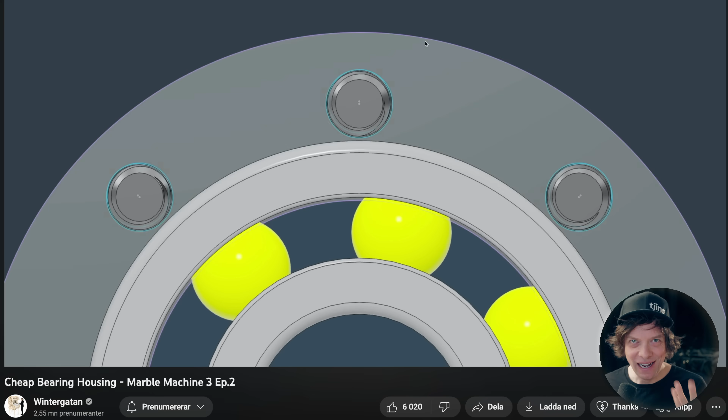Welcome everyone to episode 3 of Marble Machine 3. Last week, I caused a big controversy. I released this video, Cheap Bearing Housing. 99% of the feedback was, this is such a horrible idea. Please, Martin, stop this madness.

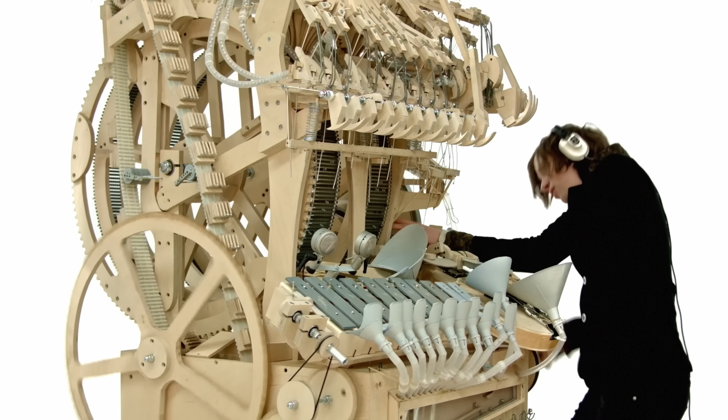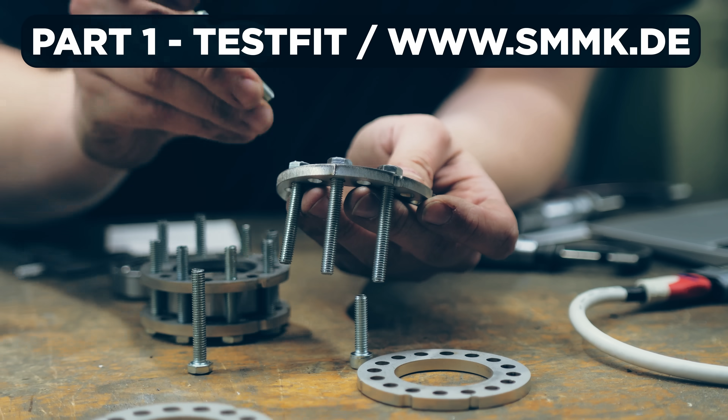In this week's video, I'm making a 3-part follow-up on this controversial design. And in the first part, Lucas from Siegfried's Mechanical Music Museum in Rüdesheim, Germany, is doing a test fit of the actual design because 24/7 Tailor Steel already sent the pieces. It was really fast and we can test this design out in real life.

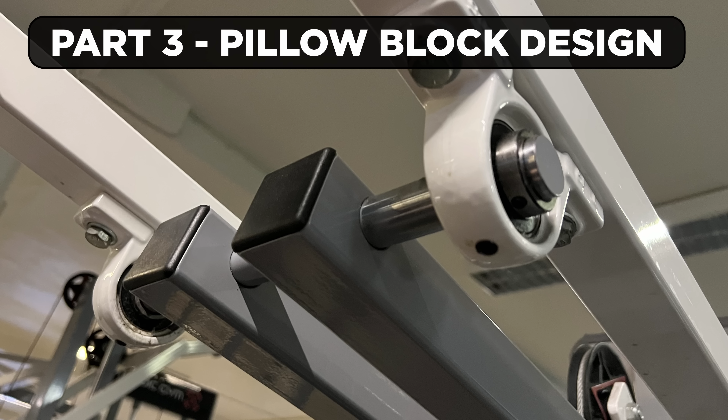And in the second part of the video, we're having a deep dive discussion about this controversial subject, and I'm using the feedback that you all left on the Reddit page as a starting point for the discussion. And in the last part of the video, I'll show you this brand new design that I made this very morning, inspired by gym machines, a design using pillow blocks, a much more standardized way to do things. So we're going deep into bearing housing discussions this week, and let's start in Germany with Lucas Wendel.

Let's open the box. How are you, Lucas? I'm doing fine. How are you? Very excited. It's the first part and it's a design that everyone loves. Not sure about that.

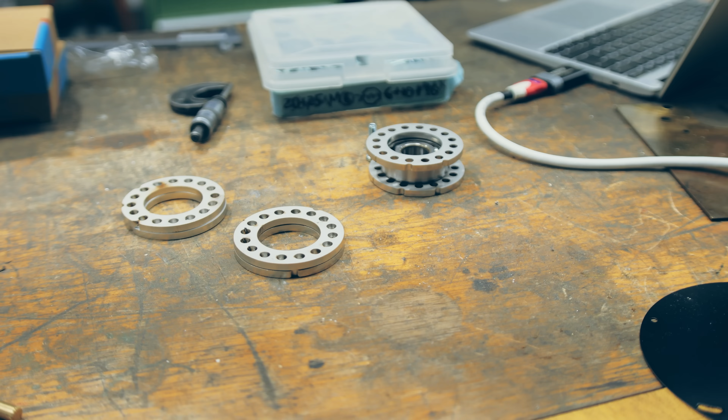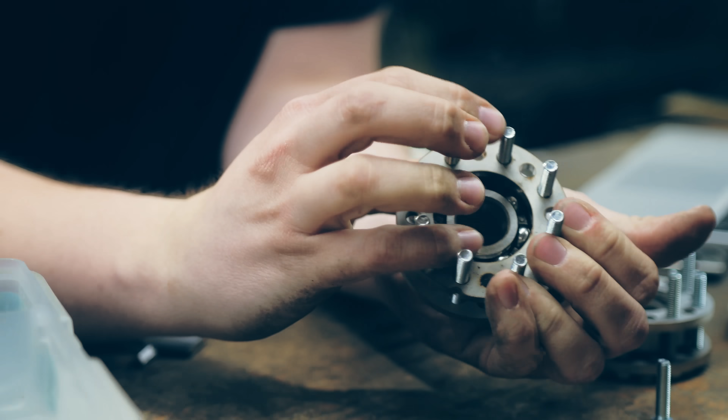So what are we testing here? These metal discs have holes cut at different positions. So what Lucas is doing is he's putting the bearing in and testing if we have a nice press fit. We started with the largest pattern, and as you can see, this is way too big, which I was expecting. So we worked ourselves down, and the smaller the pattern we tried, the better the fit we have. It's a nice fidget spinner you built there, I gotta say.

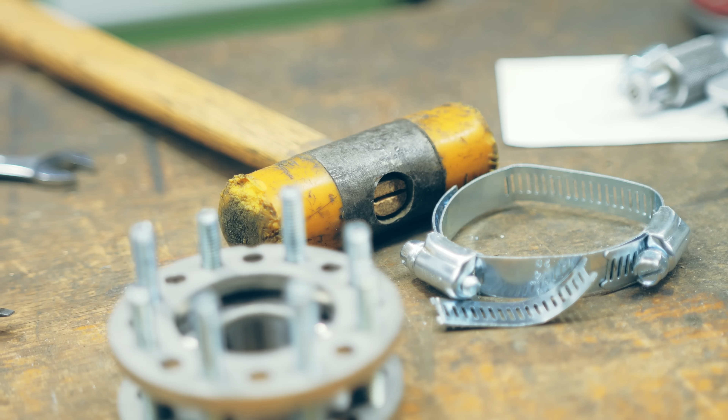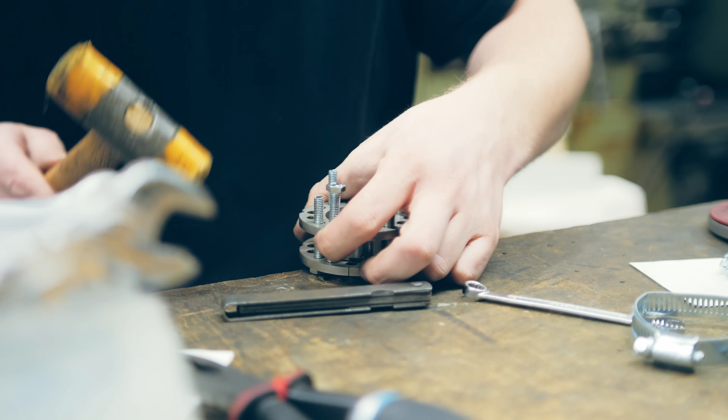Here's my whole point with this design that I think almost everyone who has left negative feedback is missing. Laser cut steel plates are not machined. They don't have machined precision. So how can we locate a bearing or a flanged bearing housing with high concentricity with a steel plate? Well, the best way to do that is to have a press fit, and at the very smallest tolerance, which Lucas is trying here, he has to hammer the bolts in, and the bearing is super snug in there.

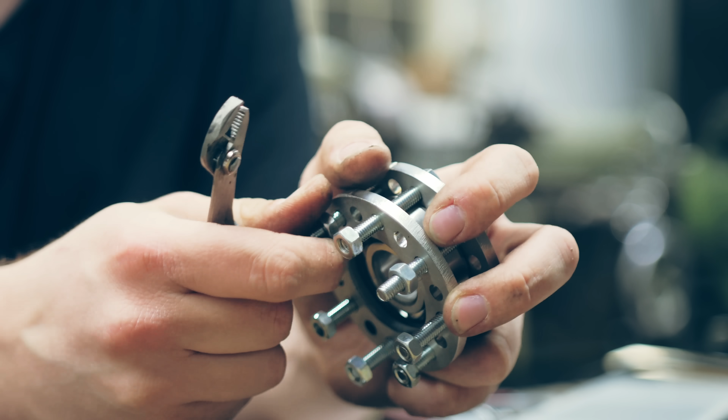At the end of the test, me and Lucas felt like the 2 tightest fits were the 2 good ones. And if I'm going to move forward using this idea, that's the fits I will use. For me personally, I do not think this is the burning dumpster fire that you all think in the comments. I think actually this is a super viable design option.

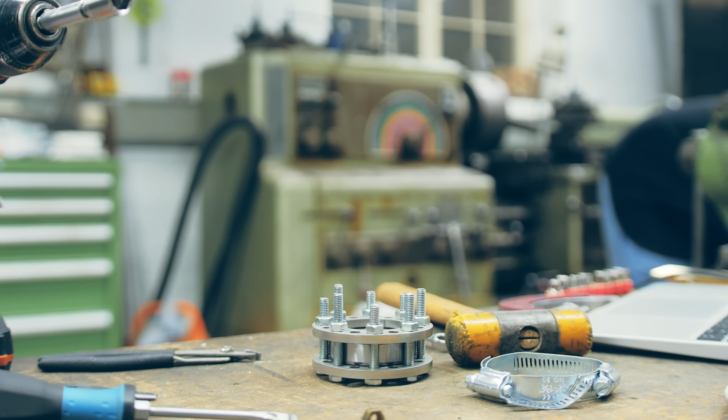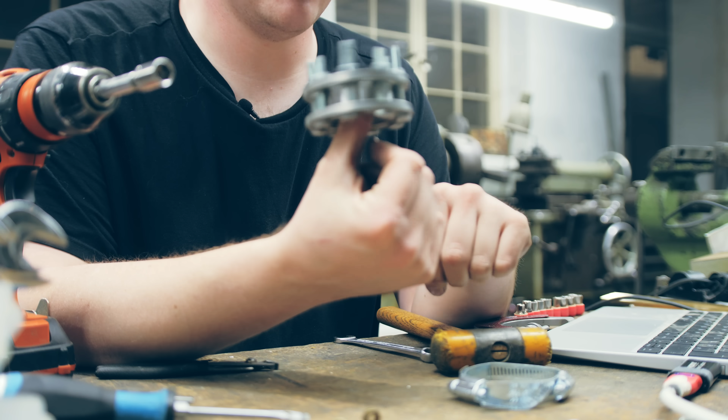This design is also clamping to the sides of the bearing, which solves perpendicularity. It pushes the laser cut plates into 90 degrees alignment with the shaft. So this design makes a press fit solving for both concentricity and perpendicularity, which I think most of all the negative feedback is completely missing. Honestly, Lucas, now when you feel it, I know you still don't like it, but do you hate it a little bit less? I'll hate it less once it shows that it can perform, because that's what counts.

Lucas had prepared a surprise for me. He had gotten the kind of flanged bearing housing that everyone in the comments thinks that I should use for this application. Okay, there we go. There we go. Here it comes.

I mean, this? Boo! You just want engineers of the world to love you more than they love me, and I think probably you're succeeding now. They can just come and thank me in the museum during the tour.

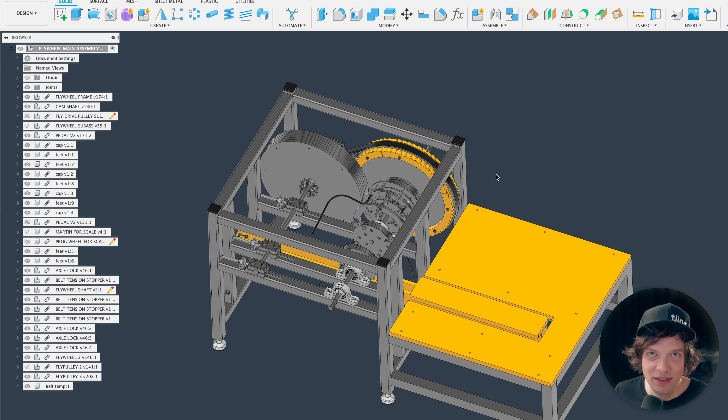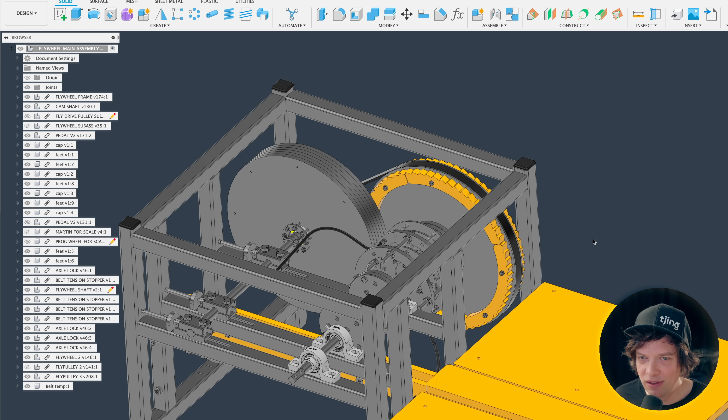This is the power input module prototype for the Marble Machine 3. The one solution that caused so much controversy and drama is this way to mount a bearing. We're going to go through my main motivation for why I want to experiment with this solution. So last week's video was titled Cheap Bearing Housing, and that was super misleading, and that's all on me. The price is not at all my main motivation why I want to try this. So the video lacked a lot of context, and it was even misleading.

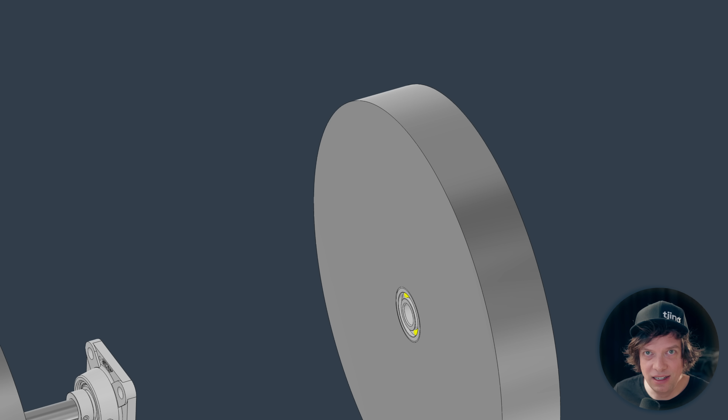So let's prime the whole discussion by showing these 4 different ways of achieving a spinning object. The first one here, 2 flanged bearing housings, off-the-shelf parts, standard solution, proven to work, very, very good. Next solution is the completely lathed flywheel. So here we have a perfect running-true flywheel, lathed by a machinist with shining metal. It would make a beautiful YouTube video. And we press the bearings in with a press fit and an arbor press.

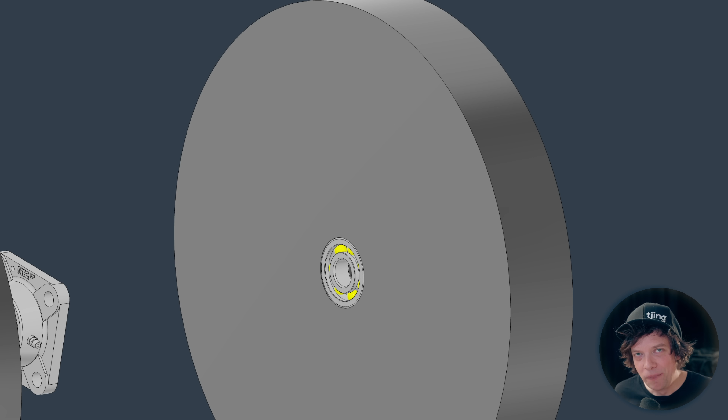It's perfection. But my friends, it's too much perfection. And here's a big takeaway that I want to share with you. The biggest enemy to a good plan is a perfect plan. So to have a machinist manually lathe this flywheel, it's very, very overkill. Yes, the bearing seating would be world class, space grade, but we don't need that for my application. So the real discussion in this video lies between these 2 solutions.

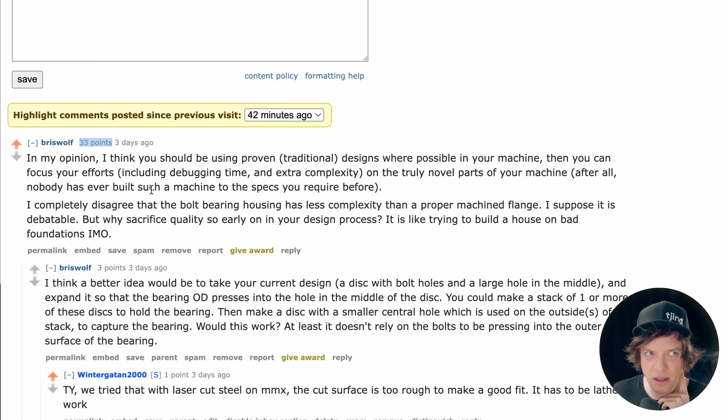In my opinion, I think you should be using proven traditional designs where possible in your machine. Then you can focus your efforts, including debugging time and extra complexity, on the truly novel parts of your machine. After all, nobody has ever built such a machine to the specs you require before. I completely disagree that the bolt bearing housing has less complexity than a proper machined flange. I suppose it is debatable, but why sacrifice quality so early on in your design process? It is like trying to build a house on bad foundations, in my opinion.

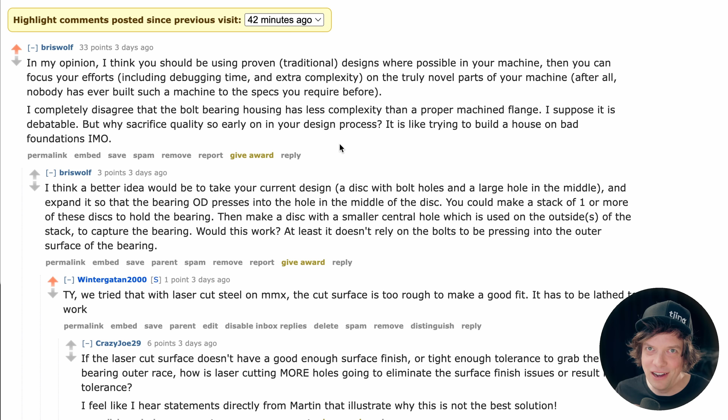Briswolf is really leading with a great example here on how to formulate feedback. It's straight to the point, it's unemotional, and it's been highly upvoted. Thank you, Briswolf, for this. Wholeheartedly agree on this first part. On the second part, I would like to address this: it is like trying to build a house on bad foundations, in my opinion.

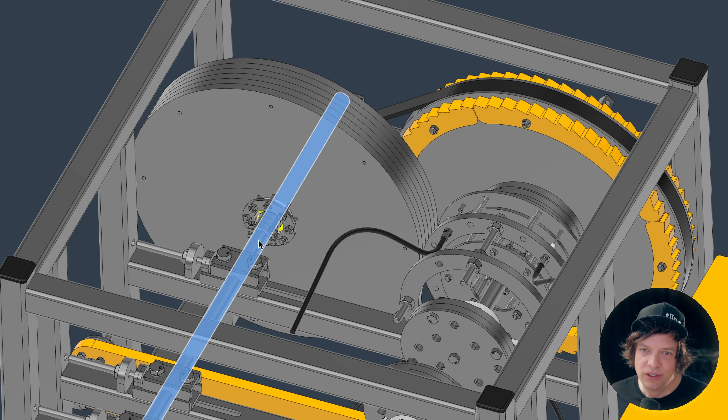The way I'm designing this machine is modular. What I'm doing here is I'm welding the steel frame. All the other parts are bolted on. So if this solution doesn't work out, I can head over and use one of these solutions. I've given myself the design space to do some experimentation. And yes, that's expensive. Prototyping, iterating is expensive. But some of that might actually be worth doing in the beginning of a process. But I completely agree with Briswolf that using proven traditional designs where possible is a winning method.

If you want this machine to be reliable, please use standard components where necessary that have been proven and can easily be replaced. Yeah, there will be so many problems with this design. I think Martin's underestimated the forces a bearing experiences. It may start off all right, but as more stress is put on the bearing as the machine gets built up, it will certainly begin to fail. I don't agree with the certainty. It will certainly begin to fail. Things are not binary. There are nuances to everything.

So let's look at the data and let's look at what the bearings are listed for, and let's compare to the forces they will experience in my application.

By the way, I am in discussions with SKF, which is a famous Swedish bearing company, to provide feedback on all my designs, and they have given me positive response. They are looking at my flywheel designs. They're application engineers from SKF actually looking at my designs currently. I haven't heard back from them, but I'm asking them for advice as well.

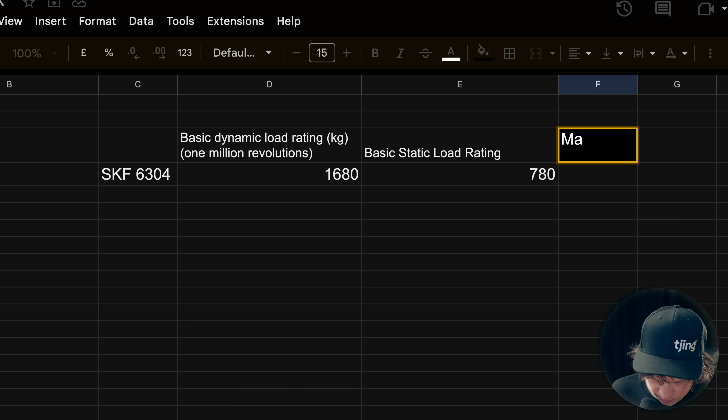Basic dynamic load rating, 16.8 kN, basic static load rating. And then we have 2 RPM numbers. We have reference speed and we have limiting speed. And we can use the lower rating, the limiting speed. Max RPM 15,000. 2,000 RPMs is the max RPM of the flywheel.

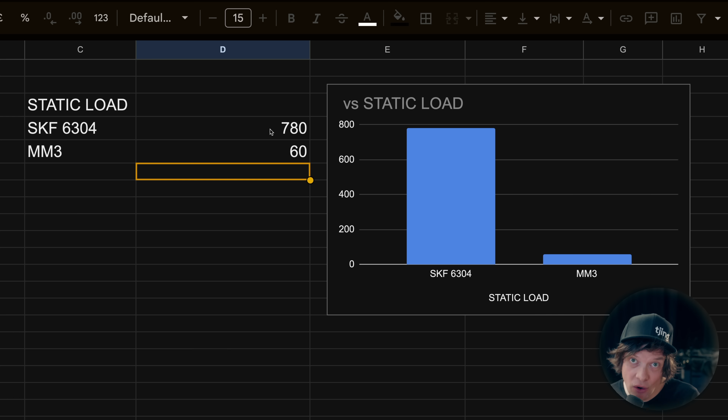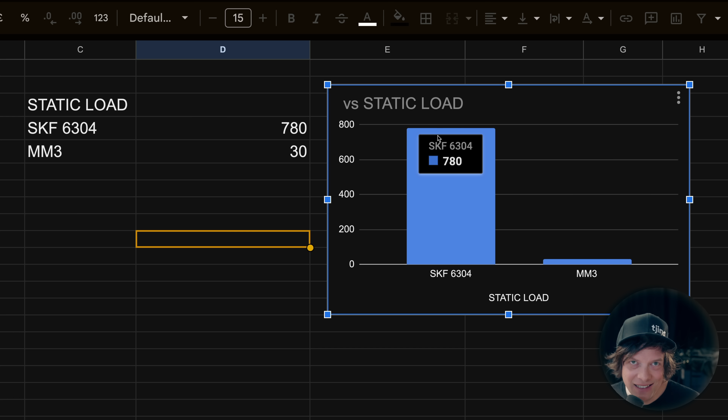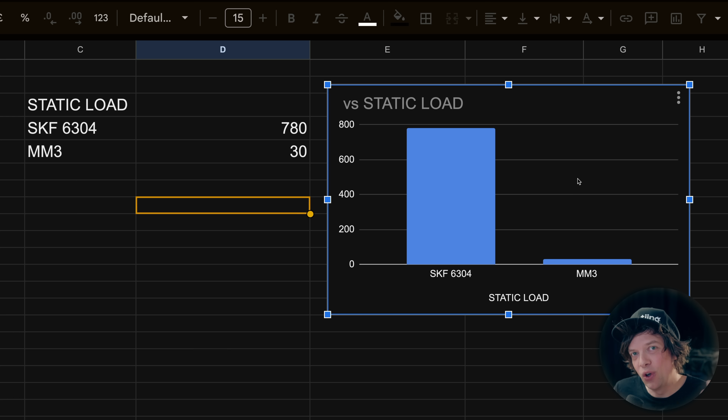So the static load, the MM3 flywheel weighs 60 kilo at max. So the bearing is listed for 780. Oh, wait, I'm using 2 bearings, so we have to half one of these. 30 kilo is the static load. So as you can see on the static load, the MM3 is kind of far from using the listed capabilities of this bearing. There is a little bit of a design space opening up here when the bearing is capable to do so much more than what I'm asking the bearing to do, perhaps.

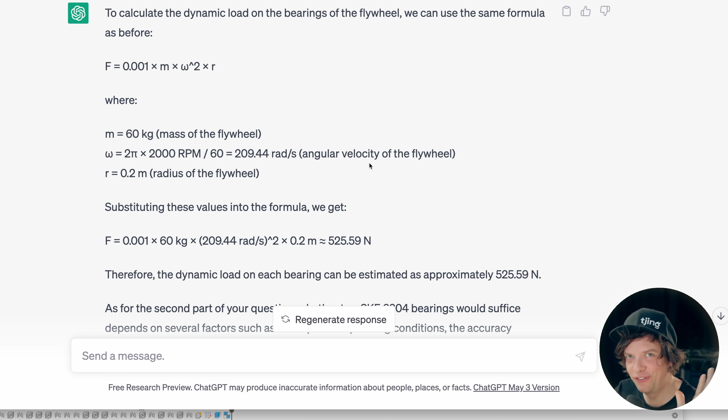What about dynamic load rating? I asked ChatGPT about dynamic load ratings, and probably that's putting fuel to the fire. I know I don't have the math abilities to proofread this. 53.57 kilos. Totally admit that I'm over my head here. I can't really proofread this math. My assumption is that physics haven't changed a lot since ChatGPT read the entire internet on physics. I'm gonna go with this number, but I admit this is not really clean.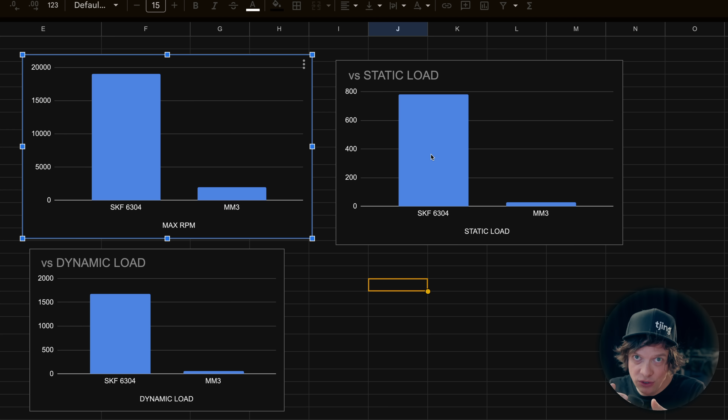So let's talk about those forces that are going to completely ruin my bearing, definitely. As you can see, I am not asking the bearings to perform at their top performance. I think this image shows there's quite clearly some headroom, some nuance, where it might be acceptable to have a little bit less than perfect bearing housing without critical failure of the bearing. But it is true that these numbers from SKF depend on the fact that you should mount the bearing in a specific way. So I'm not saying that this proves that my bearing housing works.

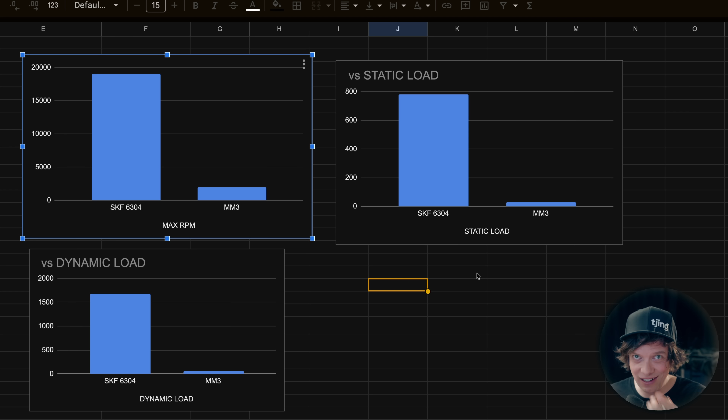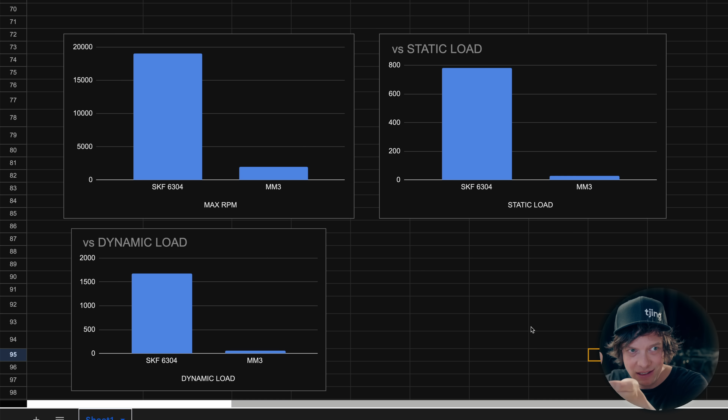In summary, the perfect is the enemy of the good enough, and that is directed at everyone in the comments and Martin himself. Before moving on to the next Reddit feedback, I want to give you a little bit more context of my motivation for even trying this strange unconventional design. I'm experimenting with how much I can design for one supplier, 24/7 Tailor Steel.

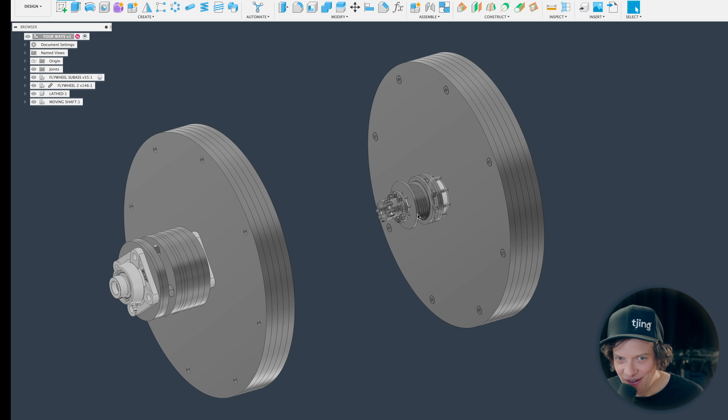So here comes the next type of feedback. Everyone's suggesting me to use a flanged bearing housing. "I would definitely be using a flanged bearing to bolt to the flywheel plates." "A $40 off-the-shelf flanged bearing would save the engineering time trying to chase the tolerances." Would it? Well, let's talk about concentricity. I have the feeling a lot of you who have been thinking that this bearing housing is a done deal, ready-made solution, haven't considered one fact.

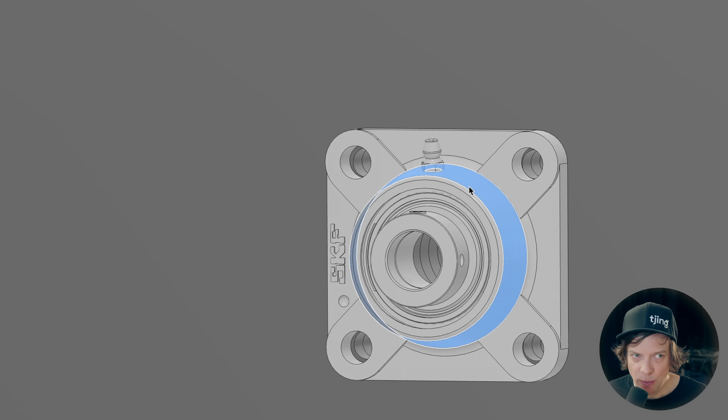We have the same tolerance issue regarding concentricity if we're using this product as if we're using this. So the bearing is concentric with the bearing housing. But how do we make the bearing housing concentric to our laser cut plate? Yeah, you put 4 bolts there and it's concentric. No, it's not. Because these bolt holes are oversized.

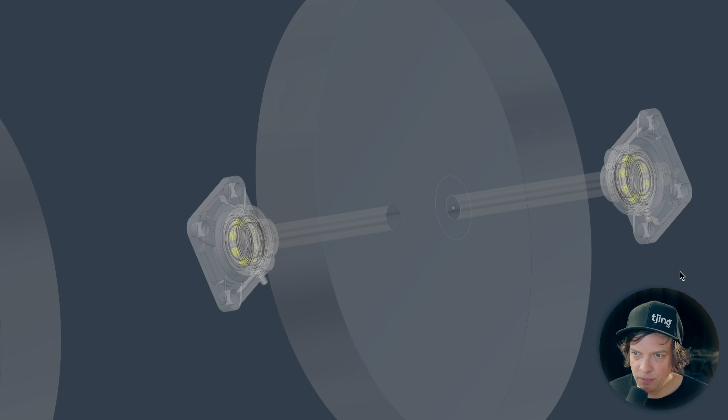They're 11.5 millimeter wide, because I think these bearing housings are not actually designed to be used as wheel hubs. I think these bearing housings are much more designed to be used in these kinds of applications. So how would we make this concentric?

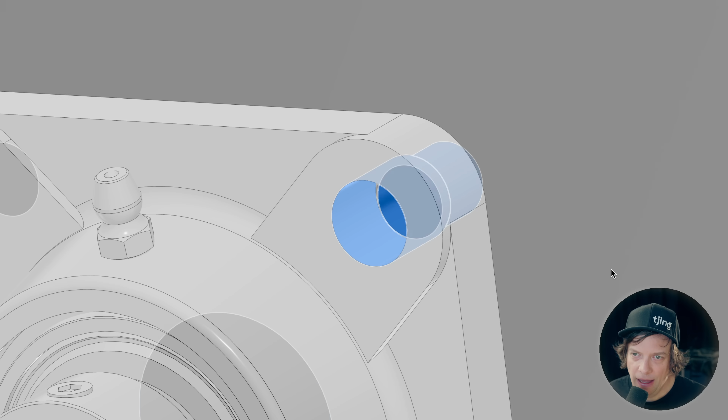Well, I would try to put the holes in the plate to one side, and we would have the same exact tolerance issue as we have on my design, relying on 4 bolts. And I would need to test cut the tolerance anyway to get something clamping as correctly as possible to put the bearing housing concentric. Whereas in my design, we're actually relying on 8 points. So we have twice the amount of position adjustment in my design compared to the bearing.

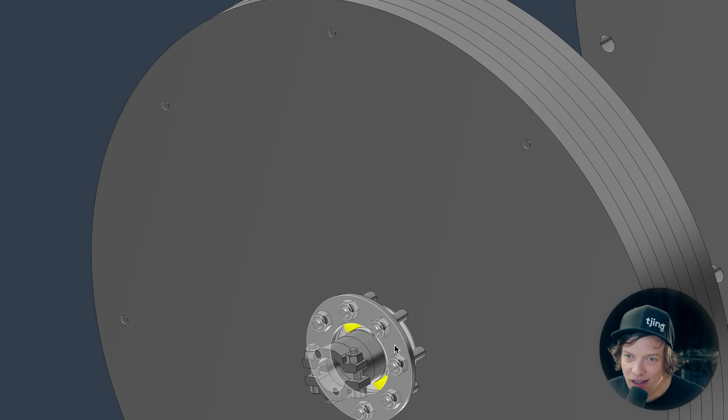This bearing housing is not escaping the issue. It's not solving the issue. Yes, it is holding the bearing in a conventional way. It is not centering my laser cut flywheel.

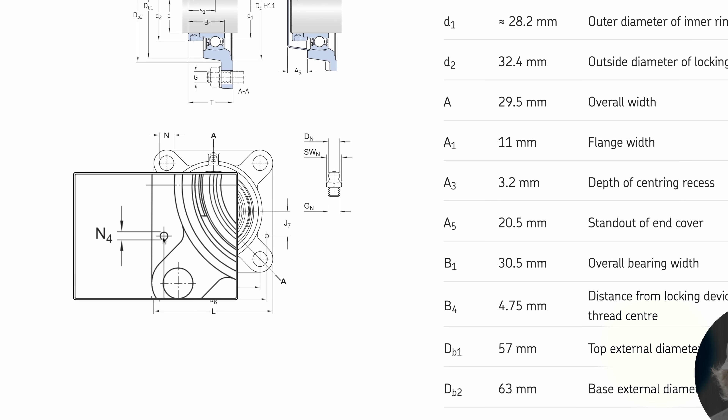Quick note here, some of these flange bearing housings actually have location pins with H7 tolerances. So we could cut this 4mm hole in our steel plates at the same position and use these location pins. We have the same problem here. Our laser cut is not a machining operation. So we don't have an H7 perfect 4mm hole on the laser cut plate side. So this location feature would help, but it's not the perfect solution.

WaxenFigure writes, the real issue you have is the centering of the bearing housing. And homemade or commercial product, that would still be the same problem.

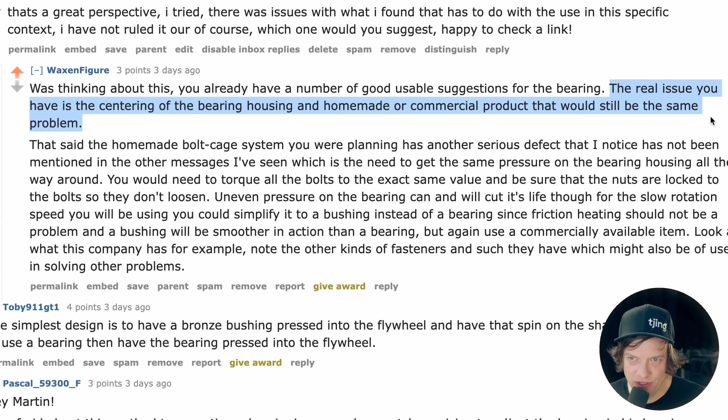I hope I'm not coming off as way too defensive. I am listening and learning from you. I'm so grateful that all of you pros out there are engaging.

Martin, please stop this madness and buy a standard housing. This product was my first idea. And I want to mention another thing that got me a little bit worried about these products, because I don't think they're made for this application at all. We have discussed concentricity. Let's discuss perpendicularity. Perpendicularity? I think that's a word.

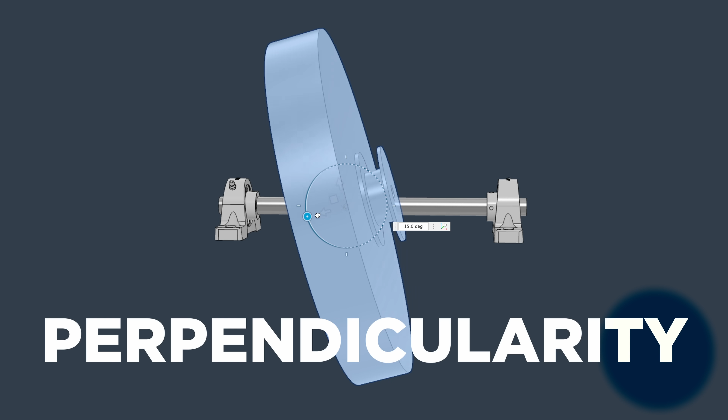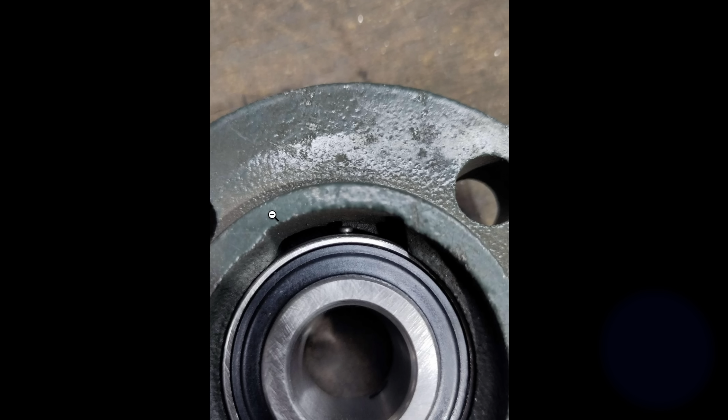The bearing is mounted in a cast iron housing, which can be bolted to a machine wall or frame. Ball bearing units can accommodate moderate initial misalignment. They are not meant to hold the flywheel perpendicular to an axle, to a shaft. So here's some images of the bearing housing Lucas bought. And as you can see here, the bearing is completely loose inside the bearing housing. So you can actually take it out like this in a specific way.

And here's a little video. And actually, this bearing is meant to pivot to allow some displacement of a shaft. So this is an animation from SKF themselves, where they show that these bearings can allow a displacement of the shaft. But this means that the bearings are not at all designed to keep anything perpendicular. So this type of non-stiff flanged bearing housing is obviously the completely wrong idea for this design.

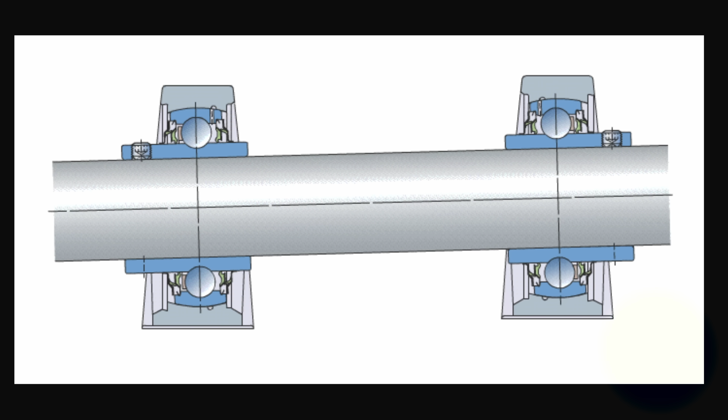And the reason they have designed it like this is to prolong the life of the bearing. This protects the bearing from failure if the shafts get misaligned. So this is a feature, not a bug, but it's only a feature if we're using the bearings the way they are intended. But in my solution, we are clamping to the side of the bearing. The shortest way of transferring perpendicularity from the shaft to our laser cut steel plates is by clamping them to the side of the bearing. These bearing types, they're designed to allow this movement.

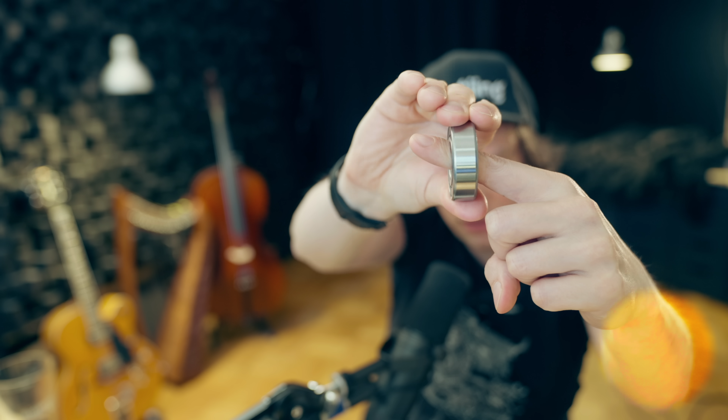Part 3 of this video, you are going to like this design.

This video is getting a little bit long. You know the famous saying, sorry for the long letter. If I would have had more time, I would have written you a shorter one. It's exactly the same with video editing.

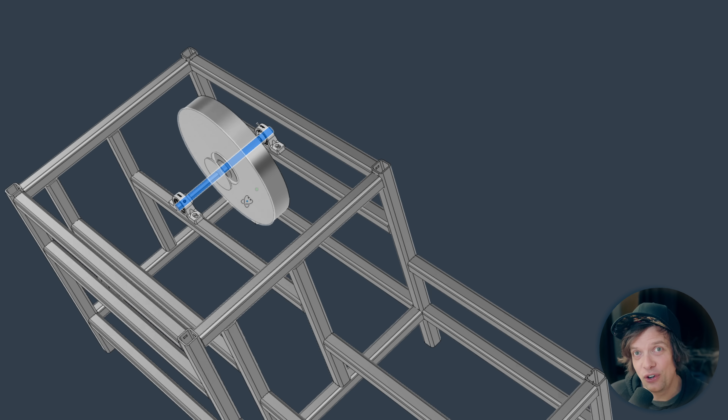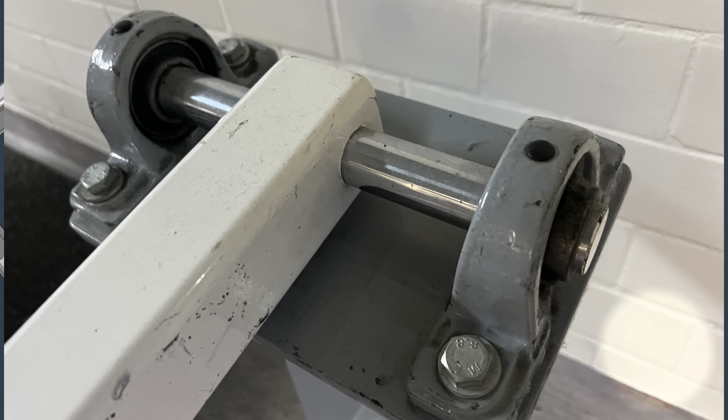So when I'm at the gym, I'm always studying how the gym machines are built, because they are sturdy mechanical machines that are meant to work forever, set and forget kind of machines. And of course, they don't have fast spinning objects, but I have been thinking about these pillow blocks that they're using. So this morning, while I was editing this video, I was like, I have to show you this fourth solution. So here we have 2 pillow blocks on the welded steel frame.

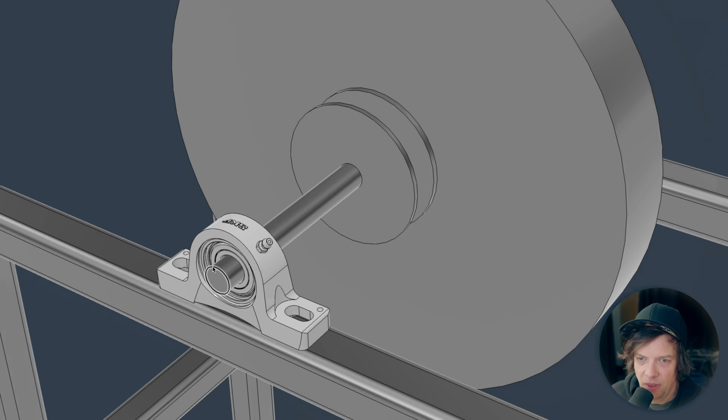As we have learned in this video, these bearings are moving in there. They're not moving left and right, but they can pivot. So let's say my welding isn't perfectly aligned. That's no problem for the bearing. The fact that they can pivot saves the bearing. So a big difference is that the shaft will be a live shaft. This shaft will be rotating, and we're clamping the whole flywheel directly to the shaft.

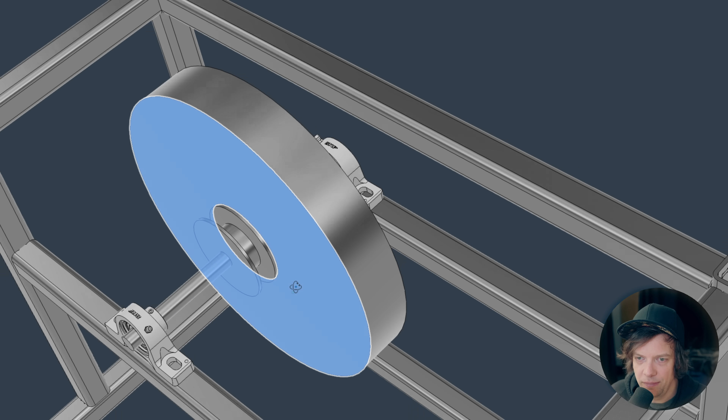So here's my issue with this design, and maybe some of you can help me out in the Reddit. How do I clamp my laser cut plates to this shaft? This is not a machined plate, so we can't use solutions that need machined precision. It's laser cut plates. What kind of flanges can we use to get perpendicularity and concentricity?

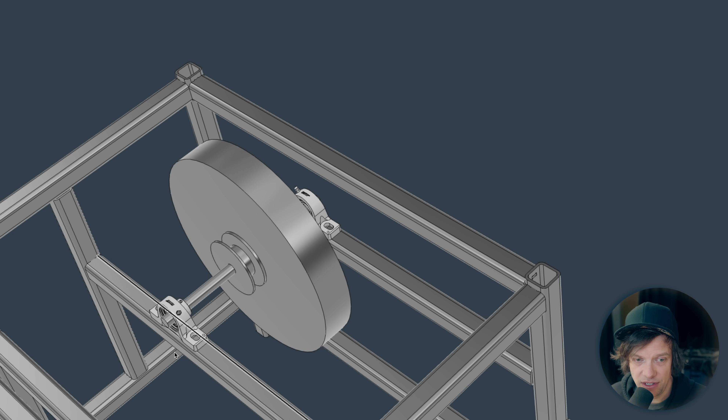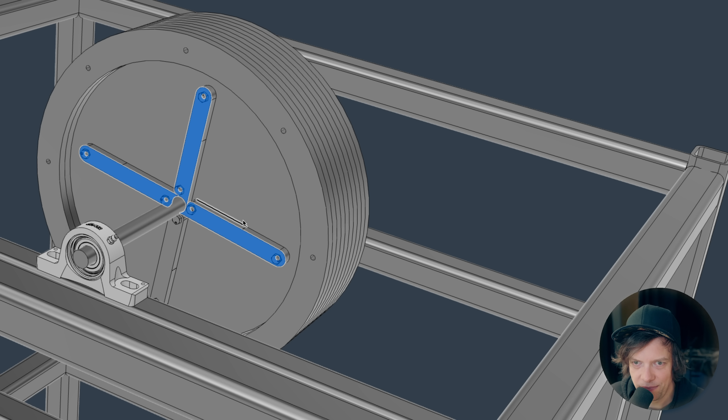So I made kind of a little bit of an ambitious flywheel here. So this is an overcomplicated solution. So by using leverage and by offsetting this bolt hole, we can pivot these and clamp the shaft and lock the shaft in place. So that's a pretty creative solution. You will scream, no, there are off-the-shelf flanges. If you find commercial flanges, I would be super happy if you could post them in the Reddit. But think about how to align concentricity with the laser cut plate which has less precision.

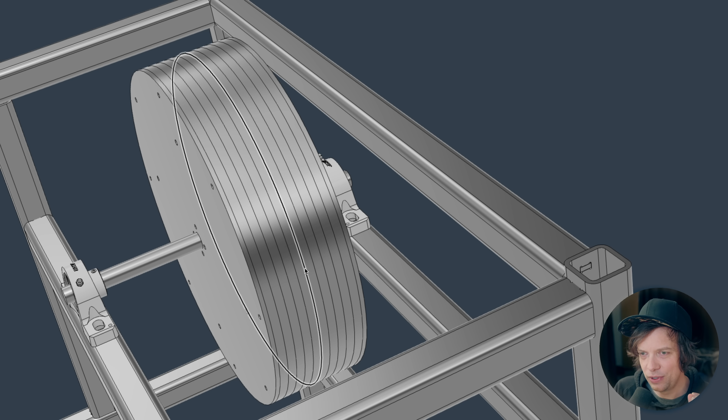But to really zoom out and to prove to you that I have been listening, what this solution does is that it's using a proven solution. We do not have to worry about the bearings in this setup at all. These bearings are going to be mounted exactly the way the brilliant engineers at SKF designed them. There's no Martin does smart unconventional shit because he doesn't think like everyone else kind of thing going on.

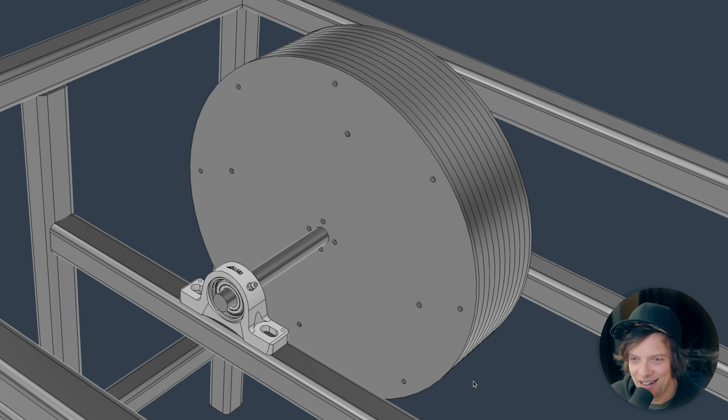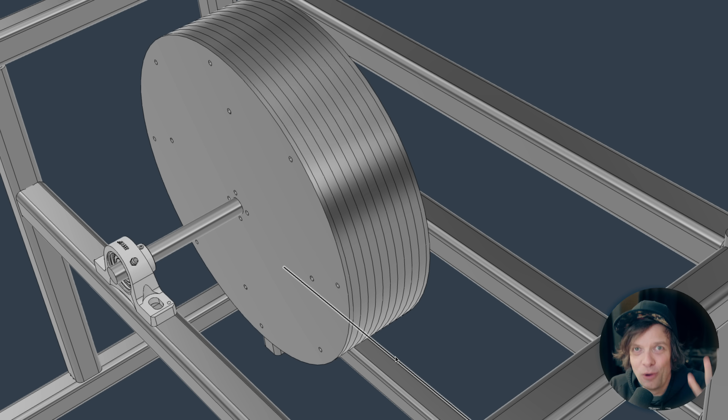We are safe. And I said so many times during Marble Machine X that I wasn't scared enough for risks. I had everything close to its limits and I took chances, and all those chances added up. And in the end, it ended up with a non-working machine. And I think that's why the feedback was so emotional from you all. You didn't want to see me do that same mistake again. And I'm prepared to think about doing it like this.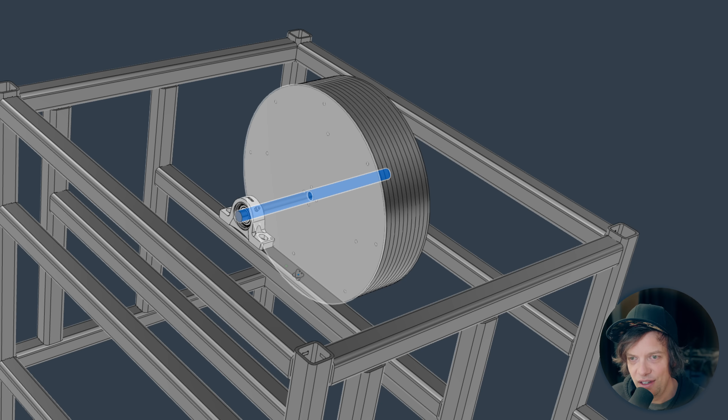So it puts higher requirements on the shaft. The shaft needs to be completely straight. I think completely straight shafts is a thing that the industry has solved. So that's probably solved. However, how do we clamp these plates perpendicular and concentric to this shaft? If you have great ideas, please leave them in Reddit. But I can't get rid of the feeling that you all are really overestimating the risks and underestimating the benefits with my bearing housing earlier.